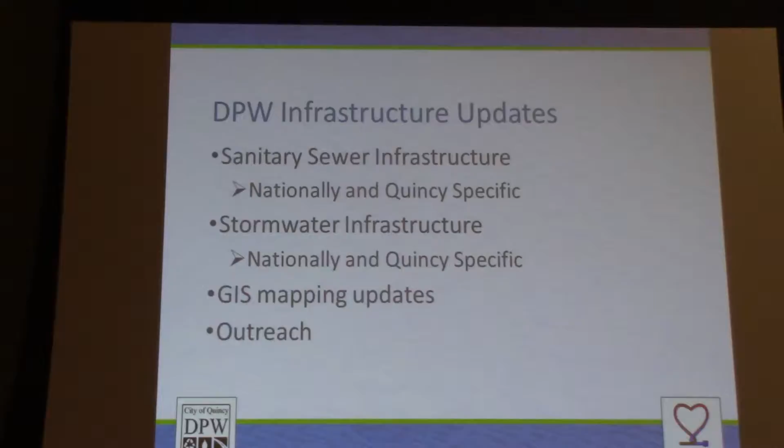So to start, the American Society of Civil Engineers gives America's wastewater and stormwater infrastructure nationwide a D. $298 billion is what is estimated to be invested over the next 20 years to keep the industry going for wastewater and stormwater systems. That number is mostly attributed to sewer pipes. The Clean Water Act initially did a lot with financial investment in our sanitary sewage treatment plants. So a lot of those have been upgraded, but it's kind of to the neglect of our conveyance system. So the majority of that money is necessary in our conveyance system. We have 800,000 miles of public sewer pipe in the U.S., and just the construction without the engineering is about $100 to $200 per linear foot to rehab the sewer pipes.

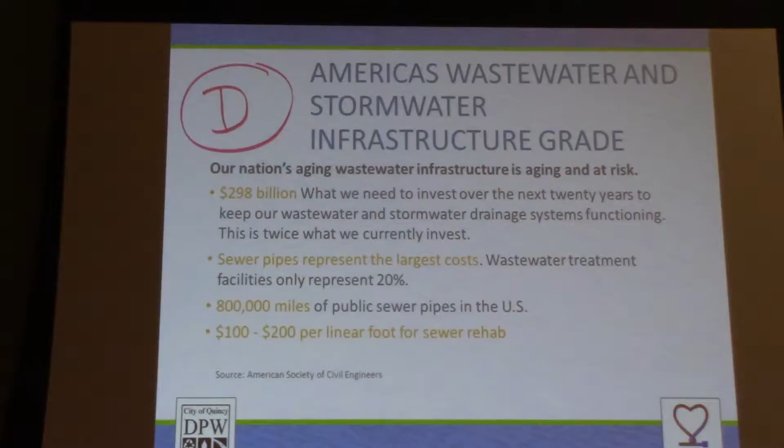And Quincy is no exception. So the average age for sewers in the United States is 47 years, and the average age for sewers in Quincy is 92 years old. And 80% of our sewers are greater than 80 years old, and we have 176 miles of sewer pipe that is greater than 80 years old. These pipes are not meant to last forever. They do have a lifespan, and they're approaching the end of their age.

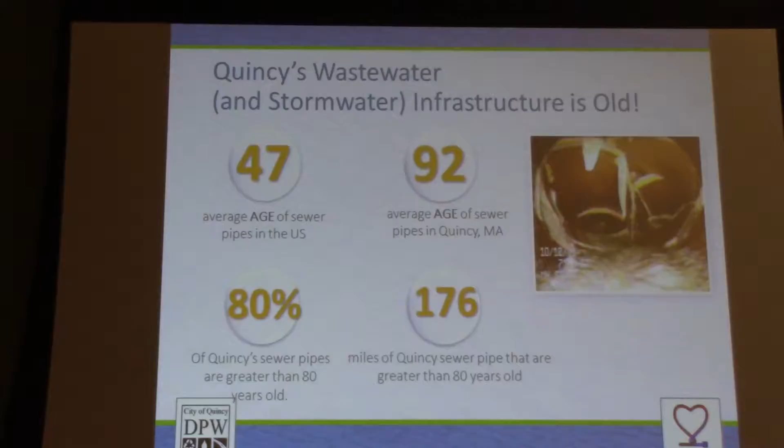So one of the exercises I did when preparing for this presentation was to actually figure out not only is our infrastructure old, but our infrastructure is also very vulnerable because we have so much coastline. So I created a 200-foot buffer around all of our coastline on GIS and calculated that we have 66,851 feet of sewer pipe located within 200 feet of the coast.

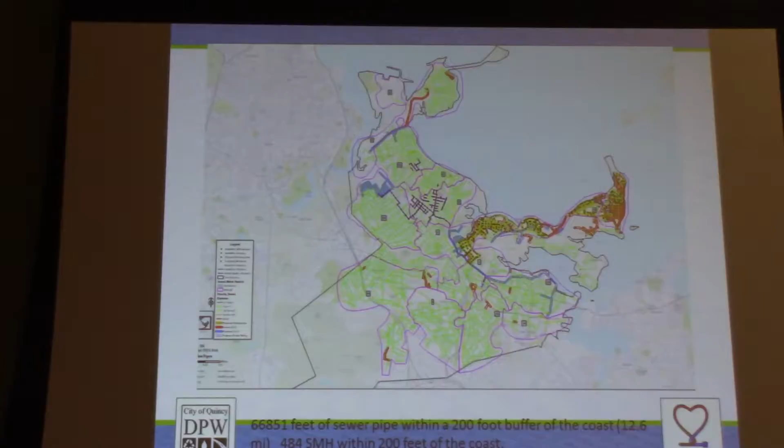That's 12.6 miles of pipe that, just by location alone, is exposed to tidal influence. And we have 484 sewer manholes also within that same buffer. So when we're that close to the coast, we're subject to tidal infiltration, and also the salt water can cause damage to our infrastructure, either wear of mortar and things like that in the manholes.

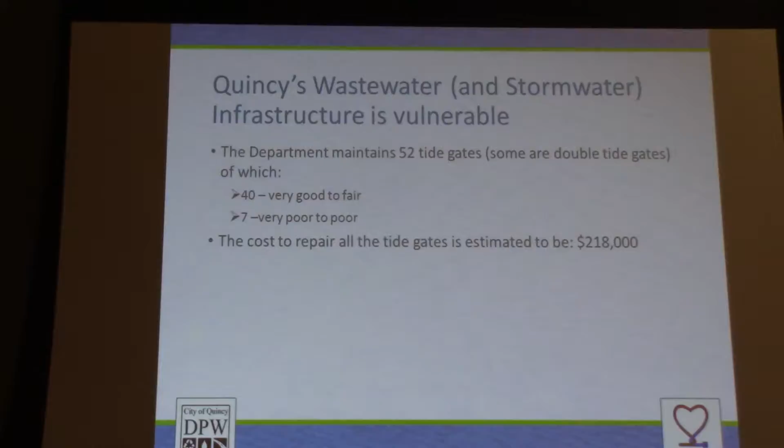So in addition to our sewer infrastructure being old, we also have other old infrastructure. So we're talking a little bit about stormwater. We have 52 tide gates. Some of them are double tide gates, that's why that number doesn't add to 52. But 40 are in very good to fair condition, and 7 are in very poor to poor condition. The estimated cost to repair these is about $218,000 if we were to repair them all now.

Again, we're vulnerable. These are our outfalls. I'm sure anyone who has coastal area in their district will understand that outfalls are essential to getting flood water off our people's streets. 18 outfalls right now are in poor to very poor condition. This is Sexton Circle. 115 outfalls are in fair and very good condition. We have 308. Some we can't even find. They're buried, they're broken. But of the ones that we can locate, we have 18 that are in poor to very poor condition.

Some of the outfalls are very large, and the cost to rehab them, I think the one on Chickatawbut was over $1 million. But some are less, some are 8-inch pipe. So right now, we're going through an assessment of which outfalls we think we really need to hit first for rehab.

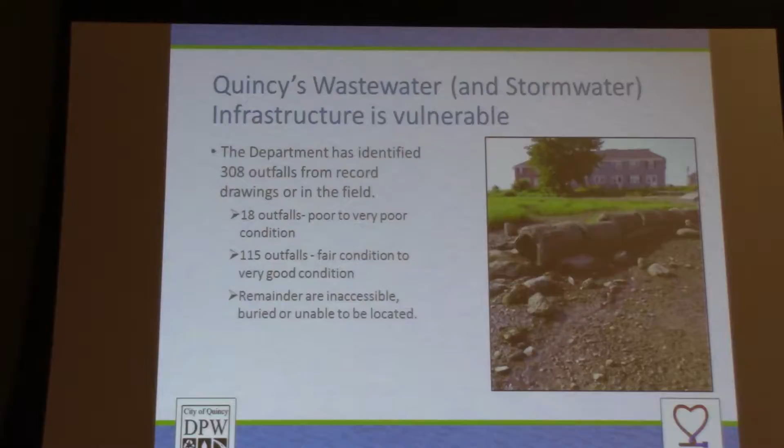We'll talk a little bit about our drain infrastructure: 9,329 catch basins, 3,005 drain manholes, and 150 miles of drain pipe. In fiscal year 16, we cleaned 3,120 catch basins, 1,180 tons of debris, identified 272 catch basins in need of repair, and repaired 75. That's the maximum our budget allowed us to do. And disposed of 7,011 tons of debris from street sweeping.

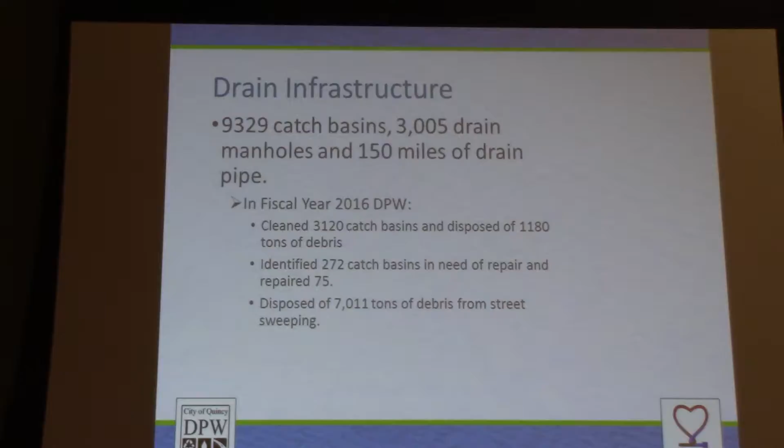These budget items are relatively new. With the help of the mayor and the help of this council, we've been able to fund this additional work. It's essential to our communities, specifically catch basins and street sweeping, because it helps get the floodwaters off our streets and drain more efficiently.

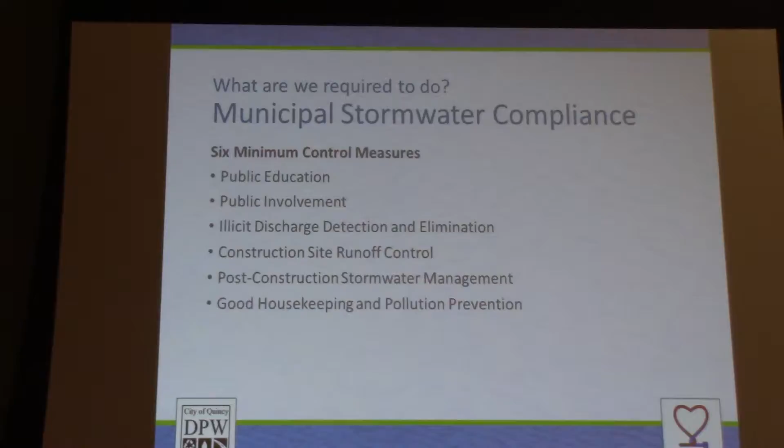That's something our department has really been focused on, being more innovative in how we can leverage funds from one to solve a problem on the other side. So there it is, illicit discharge. MS4 investigations require us to map our entire stormwater system. Right now we have a good majority of our stormwater system mapped.

It's a good time to pass out my maps. I like to bring technology, so I'll pass out the iPads and you can take a peek. I think I'm in the sewer layer, but you can click on an asset, a pipe or a manhole, and information on that will come up on the side. We have all of our plans scanned. If you were in the drain layer, you could click on the outfall and see the photograph of the outfalls that we take. Can you pass that on?

On the other iPad, in addition to mapping what is in the ground, our infrastructure, we also have condition assessment related tables. When we do a condition assessment of something that's not permanent, some condition that changes, we track that in a table and relate the table to the asset, because initially the condition of the manhole may be X today, and after we rehab it, it's Y. So that's not something we would put as an asset ID in our GIS, but we would keep it in a condition table.

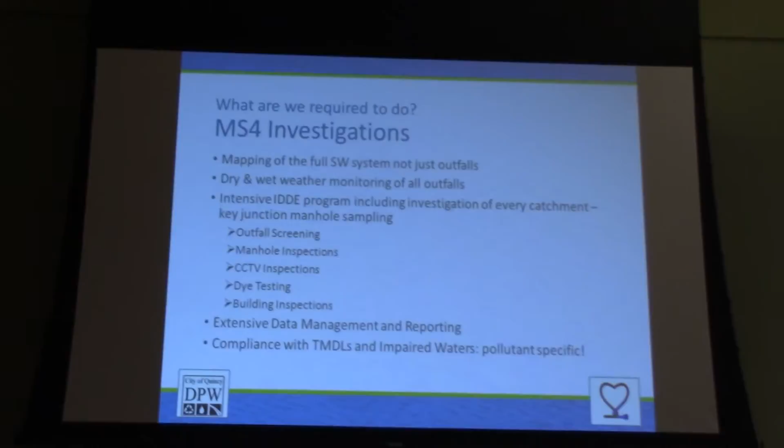I think I put it on outfall sampling, so you can find out the data we're collecting when we're doing outfall sampling. So we're mapping the full stormwater system, not just our outfalls. So as we're out there doing investigations, which we'll talk about in a second, we're also mapping new drain manholes that we find, we're mapping new catch basins that we come across, and the pipe segments that connect those.

Drain is one of those things that, in our history, because of the flooding issues that we've had, we've made changes to the drain system and don't have those updated plans. We've made them as needed because our residents have had lots of inland flooding, but it's important for us now to know where those pipes are, where those manholes are, so that we can make sure that we're keeping it up to date, and that our infrastructure is operating properly.

We also have to do extensive IDDE investigation in every catchment, which includes key junction manhole sampling. We'll talk about that in a little bit. And as part of the IDDE, that includes screening in every outfall, so we have to go to every single outfall and try to grab a dry weather sample of this flow. And we're testing it for the different pollutants and parameters that would indicate cross-contamination from the sanitary sewer.

So we'll do that in dry weather. We also have to do it in wet weather. And then if we can't find the outfall, we're allowed to grab that sample from the upstream manhole.

We are doing manhole inspections, so every time we're in the catchment and going into a manhole, we're assessing that manhole for its condition. If you look at the packet I handed out, the 4 pages, those are the data points we assess on each manhole. When we pull all the data, there's 4 pages of 11 by 17 paper, and that's every piece of data that we assess from each manhole that we open in the drain system.

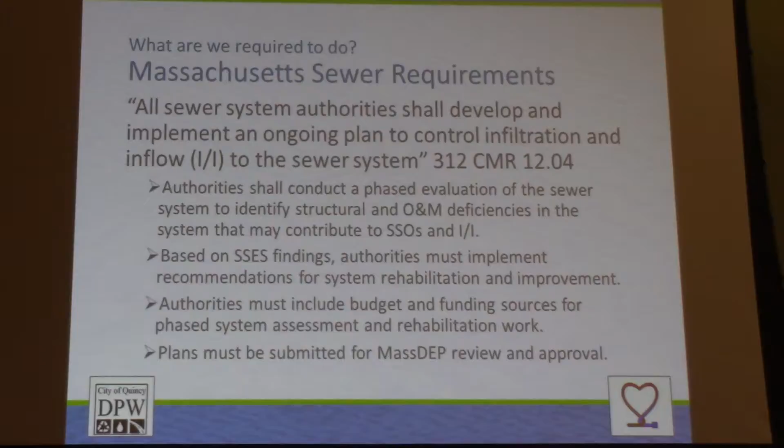So we have these two competing things. We have IDDE on one side, which is the federal requirement, and then we have the state requirement for I/I. As part of the sanitary sewer evaluation survey associated with the I/I, these are the different techniques we use to assess our sewer system. I'm not going to get into every one specifically, but it obviously requires, again, opening manholes, putting the camera in the pipe, looking at dyes, all starting to look familiar, doing flow isolation, doing some smoke testing, and lots of data management.

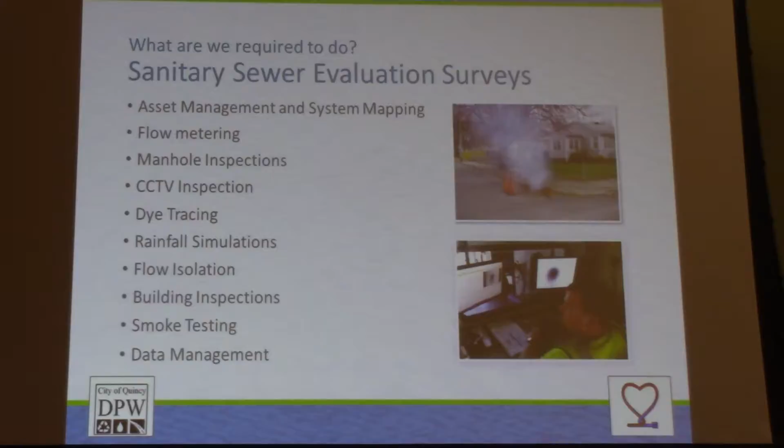Because just like every drain manhole we open, we have the same data points in sewer manholes. So for 3,000 drain manholes and probably 3,000 sewer manholes, we have all those data points that we're collecting. So as you can see, a lot of the things that we're doing, both the sewer and the drain, are kind of similar. So what the department started to do is integrate our sanitary sewer evaluation and our illicit discharge detection and elimination program.

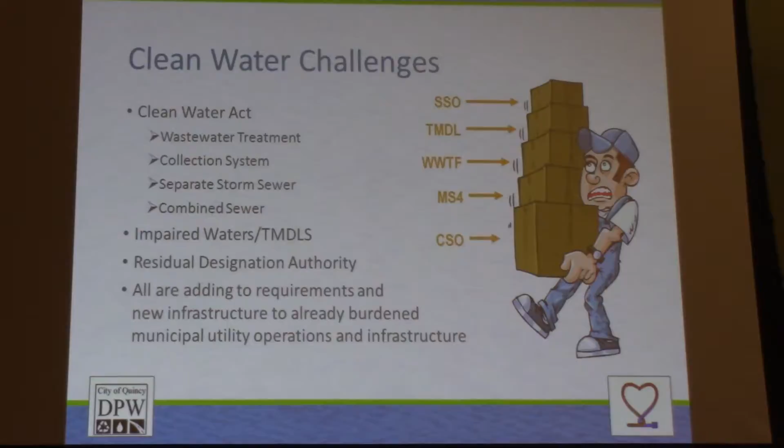And why should we do this? So these are all the things associated with the Clean Water Act. The Clean Water Act, like I said, deals with wastewater treatment, collection systems, separate storm sewers, combined sewers, impaired water. We talked about specific pollutants for different water bodies. It deals with all sorts of requirements. And to add something else on top of it just makes it more confusing. So if we look at these together, can we make it more holistic, more comprehensive?

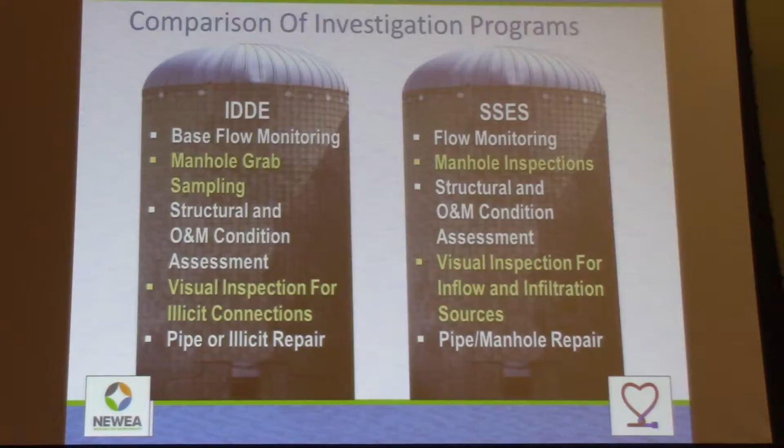So this is the comparison of the investigation procedures associated with each one of these. IDDE involves base flow monitoring, grabbing manhole samples, looking at the structural conditions of both the drain and the sewer, inspecting for illicit connections, and repairing any illicit connections. Whereas the sanitary sewer evaluation survey, again, requires flow monitoring, manhole inspections, structural and O&M conditions. These are starting to look almost identical, visual inspection for inflow and infiltration, and pipe and manhole repairs. So as you look at what investigation procedures are used in each one of these, there's clearly overlap.

And then how we prioritize. We prioritize the infrastructure areas we're going to look at in IDDE based upon our outfall sampling results, the sewer system age and materials, SSO reports, sewer and drain crossings, as well as whether a particular outfall discharges to a bathing beach. And under the sanitary sewer evaluation survey, we're looking at consequence of failure analysis, again, the sewer system age, SSO reports, hydraulic limitations, and proximity to beaches. So all this is starting to look similar.

So if you integrate these together, you can understand more how your system flows, you can do more analytical sampling, and your inspections and pipe inspections can hit both requirements. And you can make more targeted repairs so that you're correcting both an economic problem, I&I, a structural problem, as well as an environmental problem, which is the IDDE on the other side.

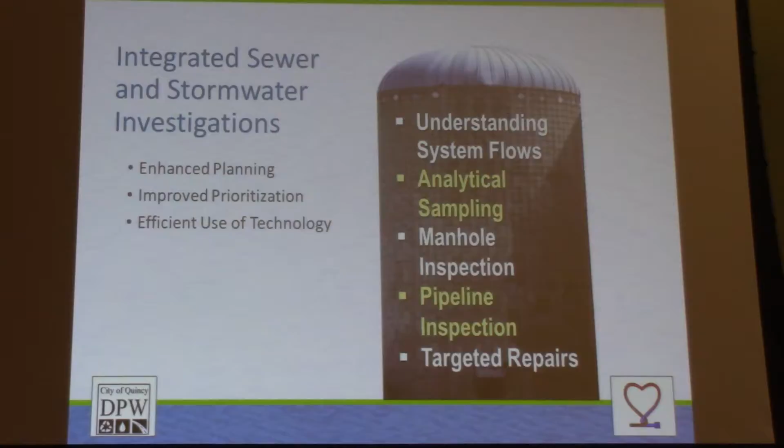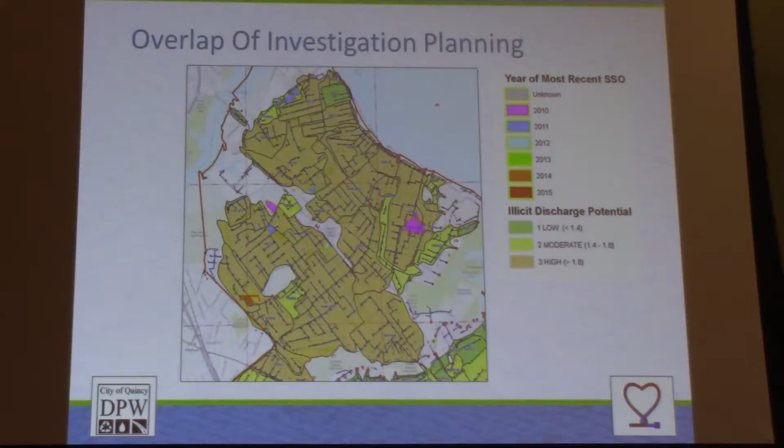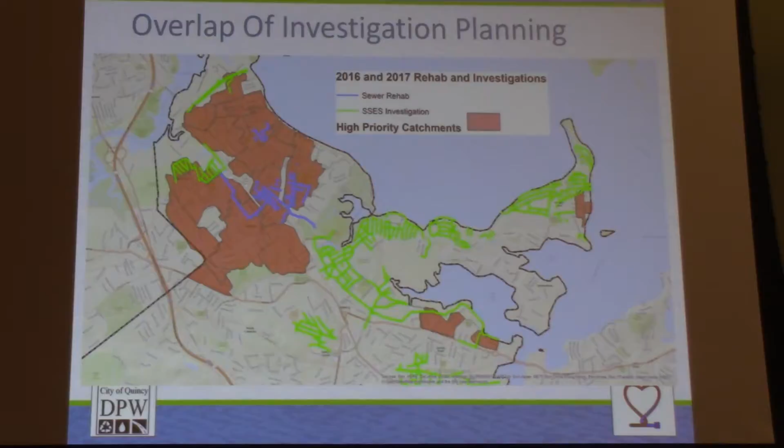In addition, we're looking at a risk-based system and a consequence of failure-based system, and we're also investigating pipes near the coast. A lot of environmental consequences if those were to fail, as well as a lot of potential savings there because we're getting infiltration from tidal water.

All right, so here's planning in action. This is an action shot. All right, so this is a catchment out by Airport Road. When we did some dry weather sampling, you can see it's blue circled with the red. When we did dry weather sampling here, we got some pretty high hits for pollutants at that outfall.

The light blue pipes are the sanitary sewer, and the dark blue pipes are the drains. So as you can see, there's some crossings. You can see where the sewer and the drain are crossing. And actually, you can't tell from this map, but the elevation of the sewer pipe is higher than the elevation of the drain. And that's problematic because when it leaks, it goes with gravity, so it's coming down, not going up. So when the drain's underneath the sewer, you have a much bigger problem. So we have a lot of crossings here.

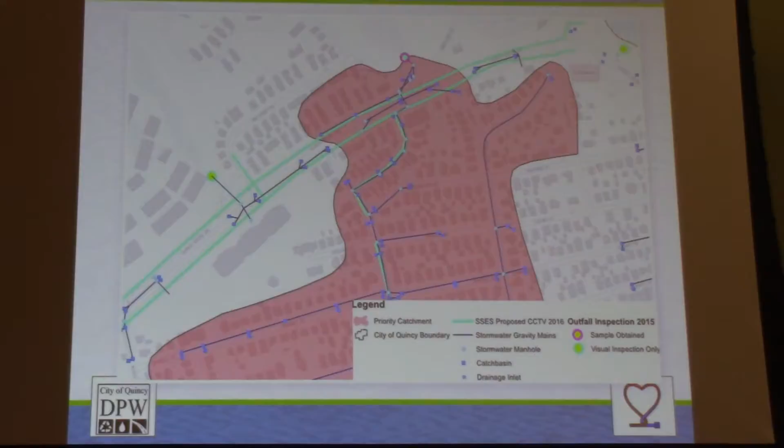So because we got the hit at the outfall in dry weather, we shouldn't have any flow in dry weather, but we did, and it was not pretty. So we decided to highlight this area for our sanitary sewer evaluation survey. And this is what we found. So that's the sewer pipe. Some pictures of what the sewer pipe looks like in those areas. All right, so we have some major problems with our sewer pipe here, and it's leaking into our drain system, which is why we had the hit at the outfall.

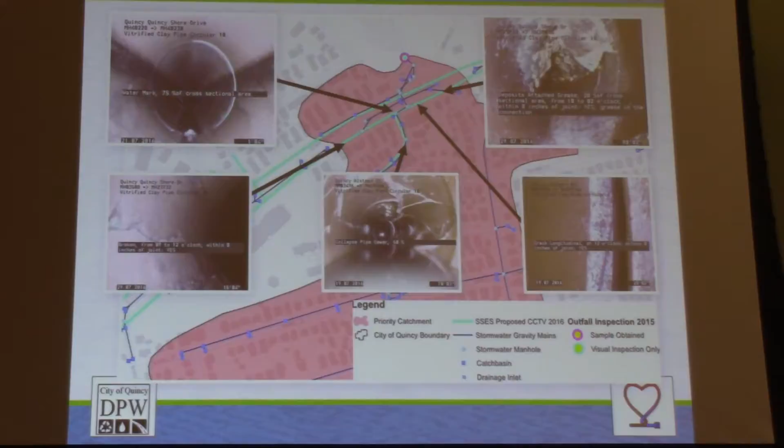So this dry weather sampling, we've only done dry weather sampling so far, we're moving on to wet in the spring. But what we're finding with the dry weather sampling is it's giving us a new way to prioritize our sewer repairs. Because sewers need to be repaired for economic reasons, to reduce the amount of I&I that we're sending to Deer Island and paying to be treated. They need to be done to keep your sewers from failing, but they also need to be done for environmental reasons. So when we're using all these different variables to assess where's the best place to put our money, we're getting the best bang for our buck.

So I don't want to talk about this in a negative light. The C Street project was planned in 2013, 2014, before we were doing dry weather sampling. It was a very successful I&I removal project, but I just want to show you what can happen when you don't factor in that IDDE variable when you're talking about I&I. This council voted to borrow, with the support of the mayor, the money from the MWRA for this I&I rehab project.

This is a 20-inch pipe along C Street, and I think we talked about C Street with the seawall earlier. So this is a piece of critical infrastructure that serves Houghs Neck. It's very tidally influenced. It's underwater probably half the day. So we cleaned it and we lined it, and all those purple manholes, we rehabbed those manholes as well. So we effectively removed I&I from this pipe. And that pipelining was done in maybe August. We hadn't done the laterals yet, but the main pipe was done in August. We still had to do the laterals.

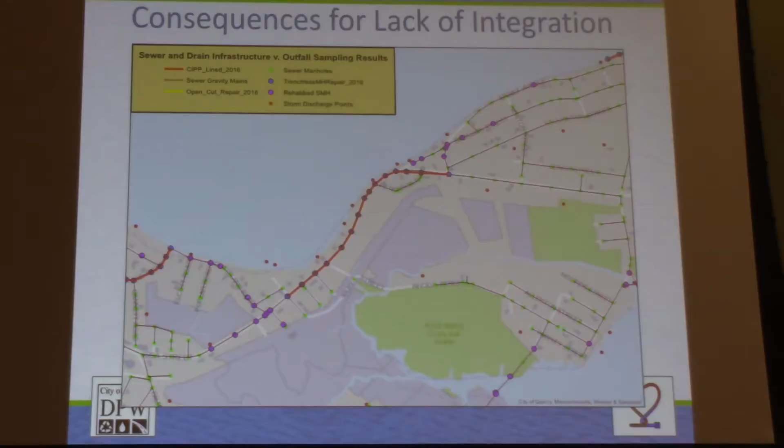So in that same summer, we went through the exercise of delineating our catchments. What that means is we looked at the elevation of the ground, as well as the flow direction of our drain pipes, to figure out which land areas discharge to which outfalls. And this is our catchment delineation for this area. As you can see, the catchments are very, very small. Some of them only have that small 20-inch pipe segment and a few other branch lines that come off. But that is the catchment delineation for C Street, and they all drain to a different outfall.

And then we did our dry weather sampling in the fall. So this was after we lined C Street. What we're testing for are parameters for sanitary sewage. We're testing for surfactants, which is soap. So if someone's dishwasher or washing machine is discharging and the sewage is leaking into the drain, we'll get a hit for surfactants there. We're testing for ammonia, which is human waste, as well as chlorine, which is evidence of drinking water in the system. We're testing the outfalls. And as you can see, we got pollutant hits at those catchments. That's after we lined the pipe.

So when we chose to line this pipe, we lined it because it was economically beneficial. The amount of I&I we removed had a direct cost-benefit analysis to save money in the long run rather than treat the I&I. The smaller lateral pipes off that pipe maybe didn't have that same cost-benefit analysis. So you have a smaller pipe, less I&I, the cost to line it. Maybe the cost-benefit analysis wasn't there, but unfortunately, because we weren't factoring in this third variable of environmental harm, now we need to go back and look at those pipes.

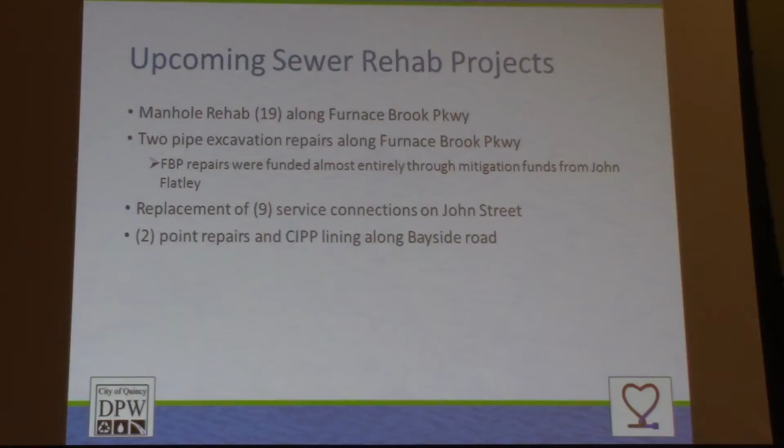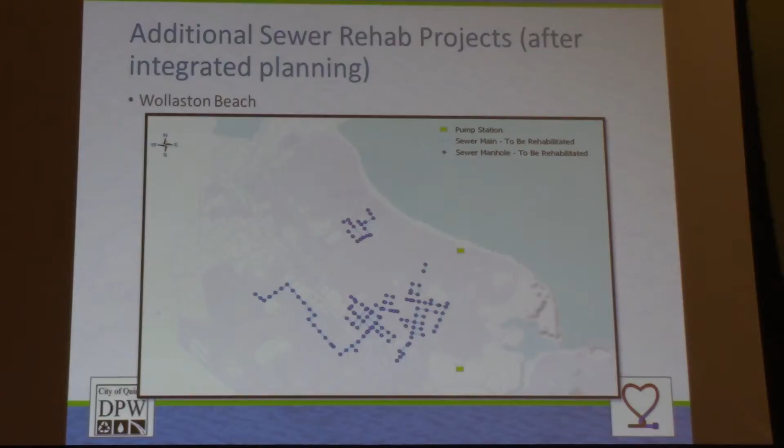Other additional sewer rehab projects: these pipes highlighted here are going to be lined, with a couple of point repairs and some manhole lining. This is part of our Wollaston Beach project, which has been ongoing for many years. The point repairs and the manholes are being done now in the spring, and the lining work will be done in the fall.

And alongside that work, we're going to be doing additional IDDE. So we're going to be doing manhole grab samples in this area. If you see this green area, this is catchment 00871. That's one catchment. All that area drains to one outfall. It goes all the way up on the top of Forbes Hill, and it comes down, goes under the train station and into Sage Road. So that's a huge area for potential pollutants to get into the drain system.

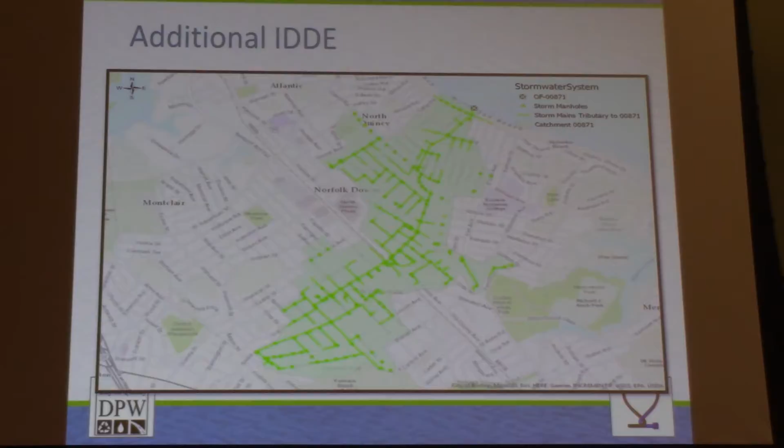So we're going to be doing some grab samples in the drain manholes. And then this is the corresponding sanitary sewer evaluation survey we're going to be doing in the area as well. That's going to include smoke testing, dye testing and CCTV work.

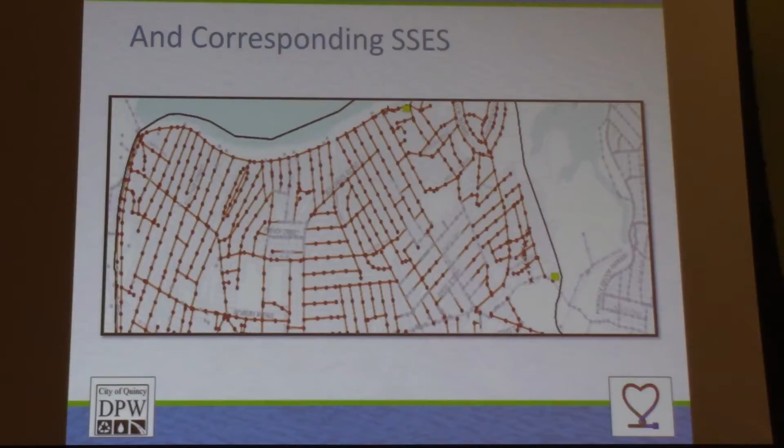And the other big thing that we've been doing is trying to get the word out of why utility infrastructure investment is important. Our residents are the ones that are footing this bill, and I think it's really important for us to reach out to them and tell them what we're doing and why we're doing it, and sort of make it, in a sense, a commodity. They can feel like they're getting something valuable for what they're paying. We've done multiple community meetings; we do them before every project.

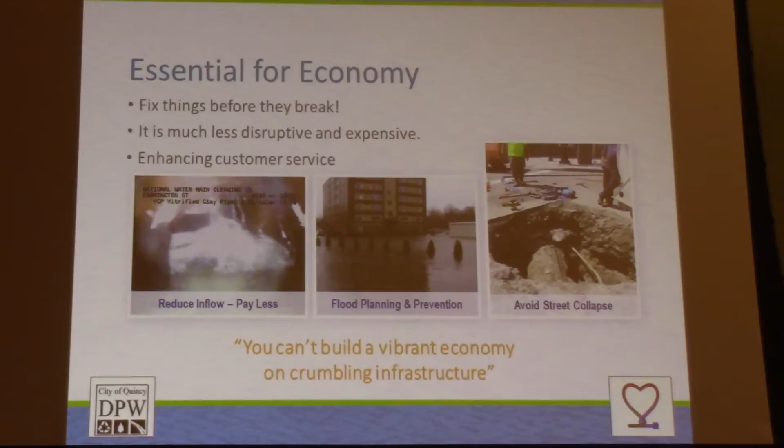We talk about why investment is essential for the economy: fixing things before they break is less disruptive, and by planning in advance, we can save a lot of aggravation and a lot of cost. We also talk about how this investment increases our quality of life. We focus on the coastal tourism issues, the amount of money generated in recreation from our beaches, as well as money generated through commercial fishing. So by investing in upgrades to our sewer system and our drain system, we're making our waters cleaner, which is really helping our quality of life.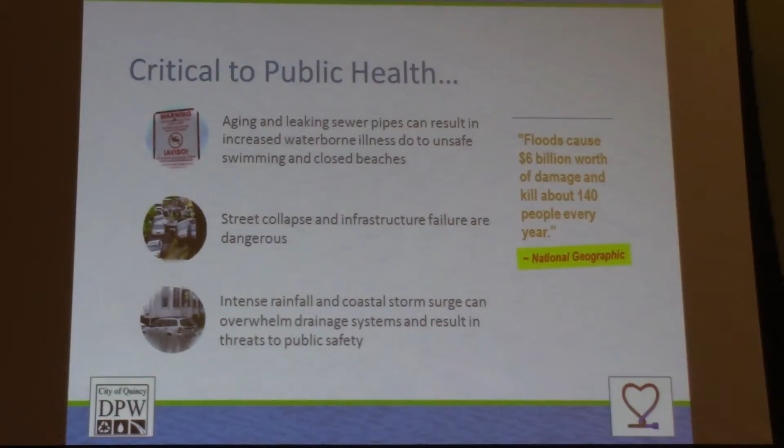And then it's critical to our public health. Obviously, there's pathogens and waterborne illnesses when we have that cross-contamination. It's a public safety issue because as infrastructure fails, you can have street collapses. And also, we're dealing with more intense rainfalls, and by making sure that we're clearing our drains and allowing precipitation to drain quickly and efficiently, we reduce the threat to public safety and public health for our residents.

When we talk to the public, we talk about how there are short-term benefits, medium-term benefits, and long-term benefits to this. The short-term benefits are, by reducing the amount of I&I, we can stabilize rates. The medium-term benefits would be, by fixing things early, rehabbing things before they break, we could actually end up saving money rather than waiting for it to fail. And then the long-term benefits, which is healthy waters for us and healthy waters for our kids, and hopefully a better local economy because of those healthy

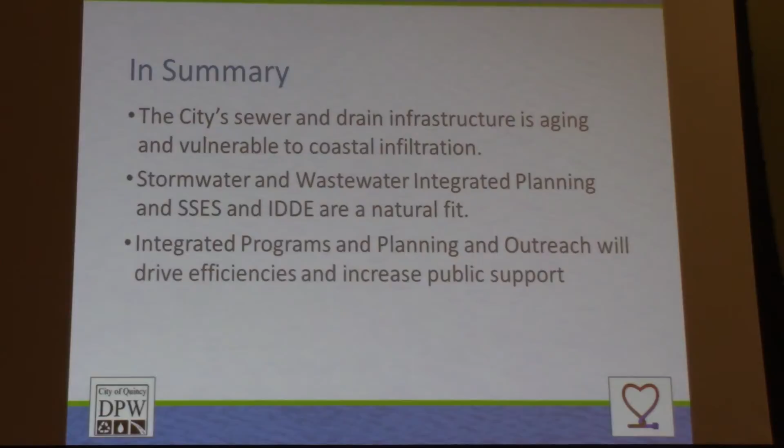So, in summary, the city's sewer and drain infrastructure is aging and it's vulnerable to coastal infiltration, but our work in stormwater and wastewater integrated planning are a natural fit and I think is a benefit economically to the city here, and integrated programs, planning and outreach especially will drive efficiencies and increase the public support for our programs. Thank you.

Thank you very much. Yes, Councilor Finn. Thank you, Ms. Hall, for your presentation. I love this kind of stuff, quite honestly, particularly the integrated concept that you're talking about. But to put this in a context, a lot of the folks that are listening, perhaps, are not going to be too impressed with the Clean Water Matters campaign, quite honestly. That might not be as important to them. There's people obviously who passionately care about the environment, don't get me wrong. But in terms of what you actually have done, what we're really talking about at the end of the day are savings, correct?

Correct. And essentially, if you were to do the analysis related to the example you gave around the C Street component, if you were to compare the cost of that to going back this second time and the cost associated with that, that's probably a significant difference, correct? Correct, because we have to mobilize again. We had a bypass set up at the time; I think the pipes are small enough that you may not need it if you could do it at low flow, but potentially a bypass, you have to do that again. Then you have to go back and clean those sewers, when you already had the company out there cleaning the main sewer.